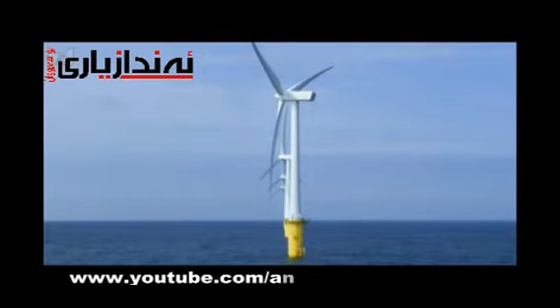We tend to class turbines by their power output, and hence their physical size. Wind farms might use many sub-megawatt turbines, each producing 400, 600 kilowatts each, or a few multi-megawatt turbines producing maybe up to 3 megawatts per unit. Apart from physical scale, they are arranged a bit differently, so let's start by looking at a typical sub-megawatt model.

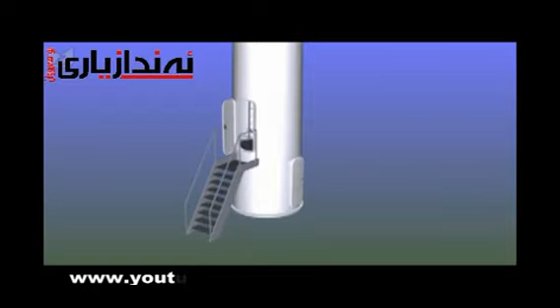Turbines of this type are typically 25 to 45 meters tall, and at the base you will often find 2 doors. The lower door takes you into a secured compartment where we have a high voltage step-up transformer. The generator at the top of the turbine is producing about 690 volts, and this transformer converts that into several thousand volts to send it more efficiently to the substation.

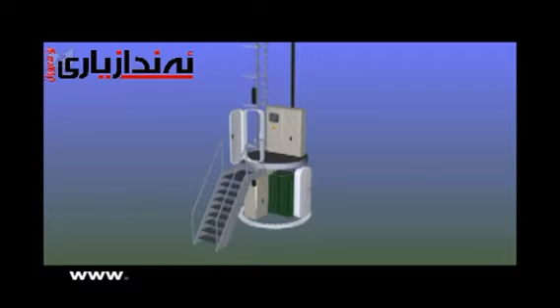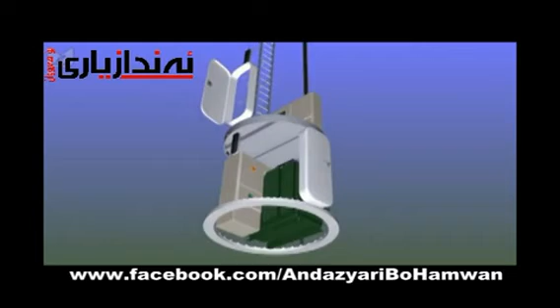The main entrance to the turbine is at first floor level, and there we find a control cabinet and the base of a ladder, or a series of ladders. Often in these smaller turbines, the ladders run to a series of platforms and they change sides at each platform to give you a rest area and a bit of fall protection. Platforms are generally just wooden discs suspended inside the tower walls, and they might have a trapdoor or a set of guardrails and a gate depending on how the ladders are arranged.

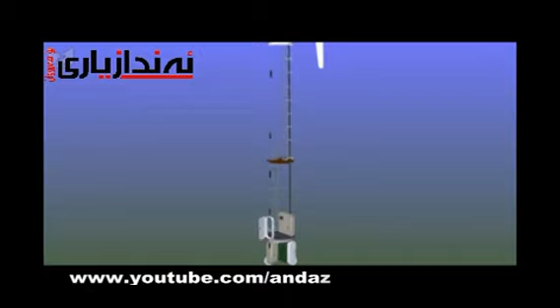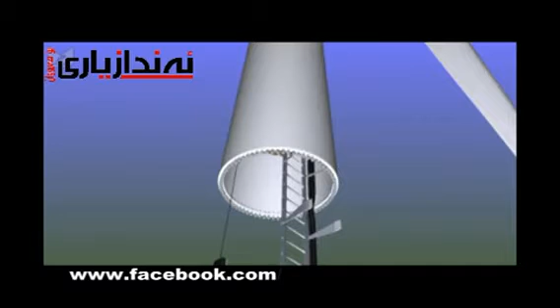The main run of cables goes up the wall of the tower, dodging past any intermediate junctions, because obviously the towers can't be delivered in a single 40-meter long section. They come in 20-meter long sections. They're bolted together with a lot of nuts and bolts. But as we move higher and higher through the platforms, they're getting slowly narrower and narrower, so the ladders are getting a little bit closer together.

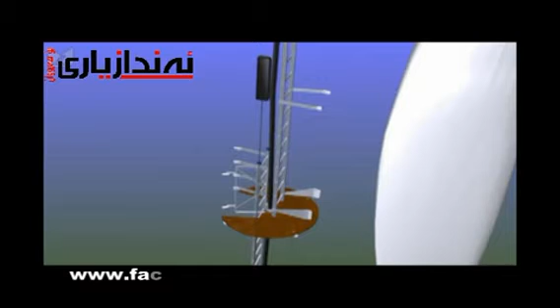But eventually the main cables stop being attached to the wall and they hang freely in the center of the tower, so they can twist as the nacelle rotates to face the wind. If they twist too many times, the nacelle will spin itself around to remove the twists. But as we move up, now the cable goes through a hole in the center of each platform, and at the top of the tower we have a steel platform with a sealed trapdoor, which we call the yaw platform.

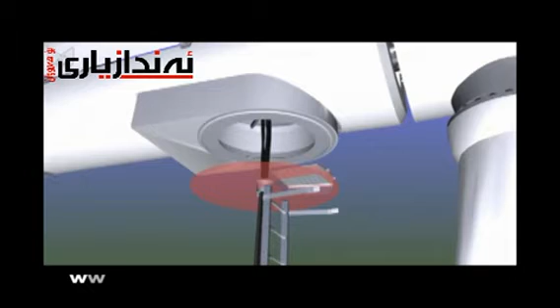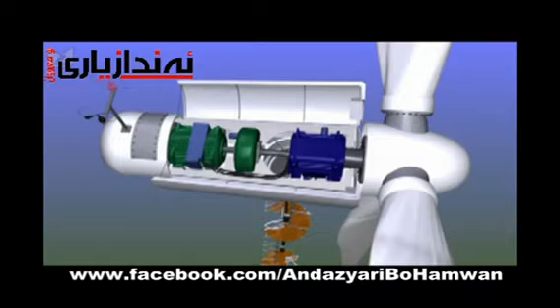Just above that we have the yaw ring with the bearings that allow the nacelle and the rotors to rotate around to face the wind. And this sealed platform acts as a bit of fire protection, also avoids people falling back down the tower, because at the top of the tower we simply have a hole through which we climb. And the nacelle in this case is a vaguely tapered tube. At the back we have the wind sensors, which give us speed and direction and allow the turbine to face into the wind and to change the angle of the blades.

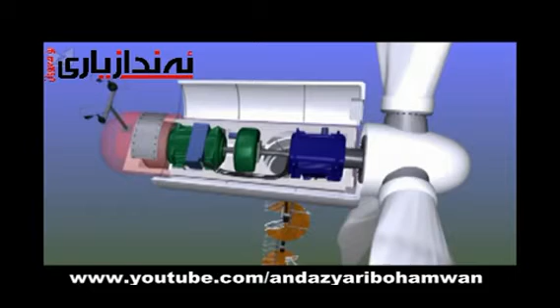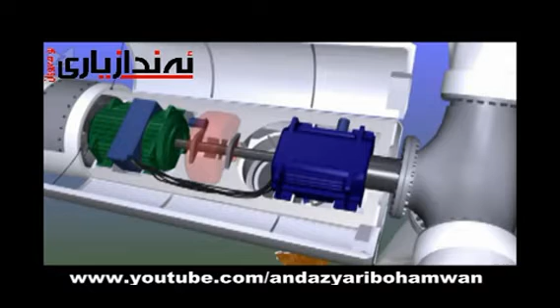The nacelle itself is just a fiberglass tube. At the front we have a similar fiberglass cowl protecting the hub, which is a steel casting on which we have bolted our 3 blades, and the blades can turn or pitch so that the angle they form with the wind can be varied. Out at the back of the hub we have a shaft which leads into the gearbox, then a high-speed shaft through a brake into a generator, and that generator then supplies the electrical power, as I say, at about 690 volts all the way back down the tower to the base.

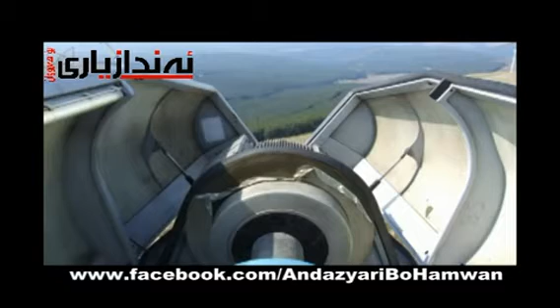And right at the back we have a cooling fan, as we're generating 500,000 watts of energy inside the nacelle. Some of that is wasted as heat, and without an efficient cooling system there is the potential for the turbine to catch fire. Now, the layout of a larger turbine is broadly similar, but some of the components are in different places, so let's start by looking at the tower section of a typical 2 megawatt turbine.

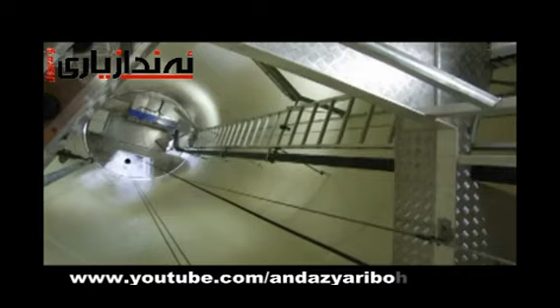Where we place the high voltage transformers in multi-megawatt turbines is a lot more variable. Quite frankly, we have a lot more room, so we can decide if they can be in the nacelle, they can be at the base of the tower, they can be on platform 1 in the basement, they can be outside in a hut. In this example, the transformer's at the top, so when we go into our door, the one thing we'll not find is a transformer.

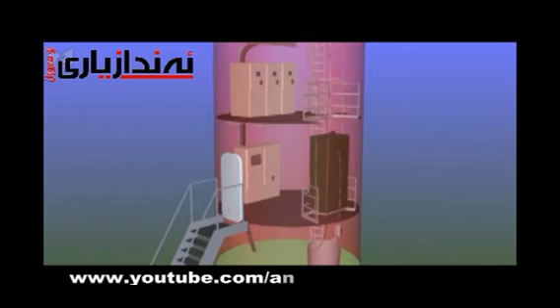We do have the high voltage switches, in this case on platform 2, but on the entrance platform we have the usual control cabinet and a lift, a little green box. And that lift will take 2 people to the top of the tower, or nearly to the top, without them having to climb the single, very, very long ladder.

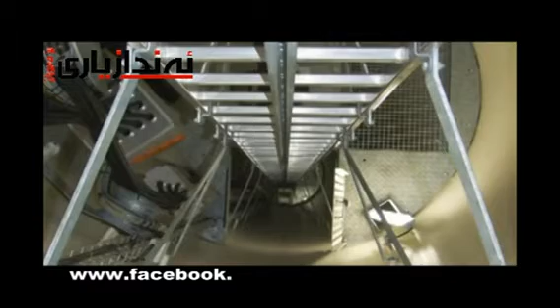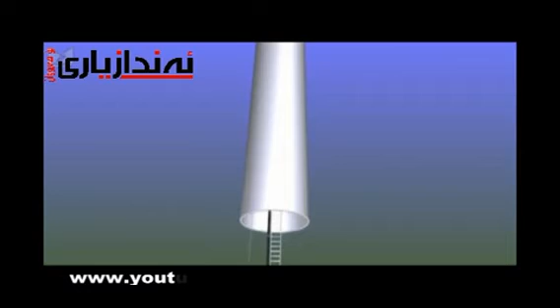Almost all large turbines will just have a single run of ladder for the majority of the run up the tower. It will have a wire or a rail system, a fall arrest device fitted to it, but it is still a long slog up the ladder, which is one of the reasons why service lifts are so important. And again, the tower's in sections so that it can be delivered around the country without demolishing villages.

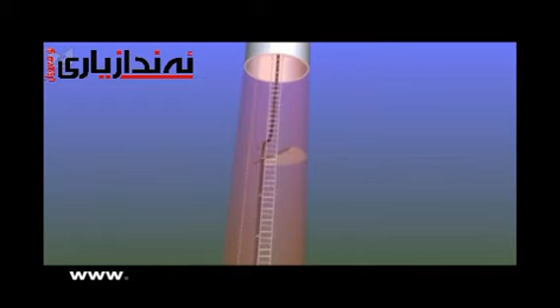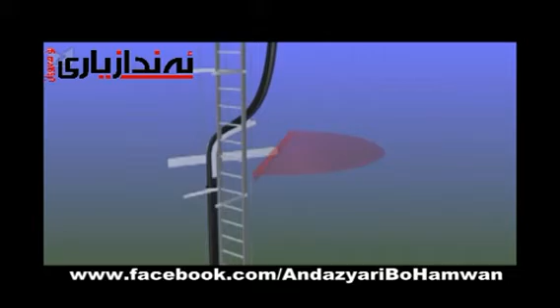Sometimes, if we're running a long distance and we haven't got room for a proper platform, we can put a half moon in place. No fall protection on the platform, but we assume you would keep your lanyards connected at this point because it's quite a long way down.

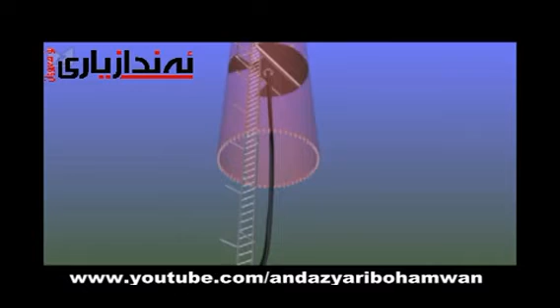The cable again breaks free from its mounting and hangs in the centre of the tower for the last 10-20 metres or so that it can rotate as the nacelle yaws into the wind, and the lift eventually runs out of space. Remember, the tower is getting narrower and narrower as we get to the top, so the lift tends to park itself about half a platform from the top, and we have a normal ladder which then leads to the yaw platform, and then it starts looking very much like the smaller turbine did.

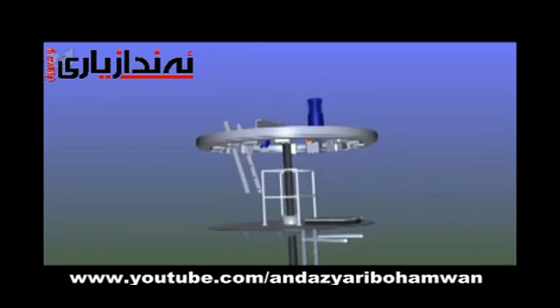We have a yaw ring bolted to the underside of the nacelle, joining it to the top of the tower. A series of disc brakes run around that yaw ring to lock it in position when the wind isn't changing direction, and when it is, we have a series of either electric or hydraulic motors that rotate the entire mechanism around on the top of the tower.

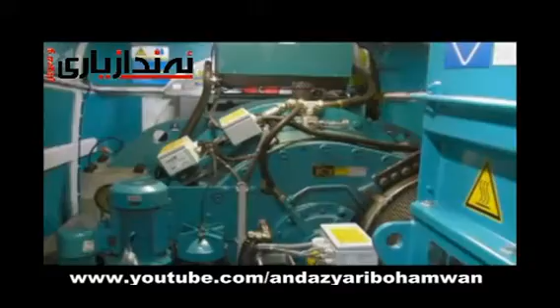The layout of a multi-megawatt nacelle is again more variable than for a smaller version. We always have to have a generator, but we may not have to have a transformer. In a few cases, such as the famous Enercon egg-shaped nacelle, we don't even need a gearbox. They're direct drive. We just have a shaft linking to a generator, and then lots of extremely complicated electronics to condition that power for connection to the grid. But in most cases, we need the same as we needed in the small turbine: gearbox, generator, possibly a transformer, all in a fiberglass box.

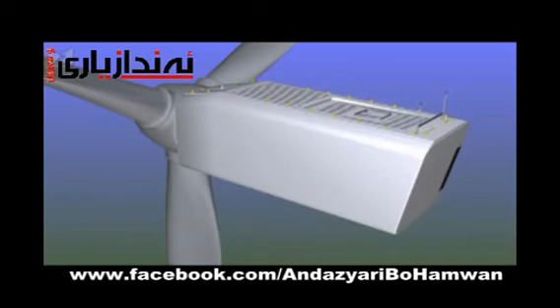And in our example, we're looking at a typical design used by a number of manufacturers where we have a nacelle that's 3 metres high, 2.5 metres wide, 7 or 8 metres long. It's a fiberglass box about the size of a site hut. As before, we have our wind sensors on the roof as far away as possible from the dirty air cast off by the blades as they spin round.

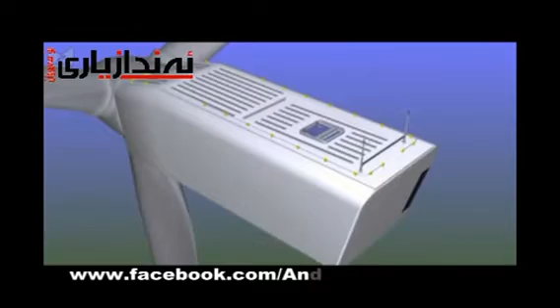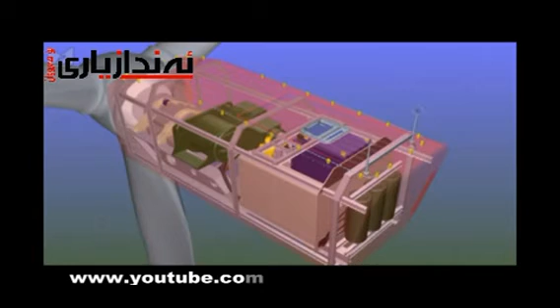This design is just a fiberglass box with a flat roof. We access the roof through a couple of skylights. Some designs are like before, big cylinder with 2 opening doors. Some have an entire roof section which opens, rather like an old camper van. If we take the skin off the box, inside we have the same kind of components we had before. They're just bigger, and there's a little bit more room, so they're laid out a bit differently.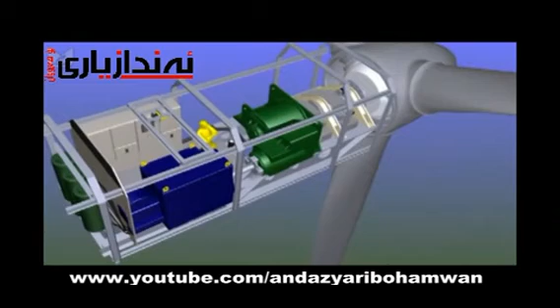The only additional component up here is those 3 green cylinders at the back. That's our high voltage transformer, which used to be at the base of the tower. Now, we've removed a lot of the control systems and the hydraulic systems that would just clutter up the pretty picture. We've added in a bloke for scale, but most of the big components are still here.

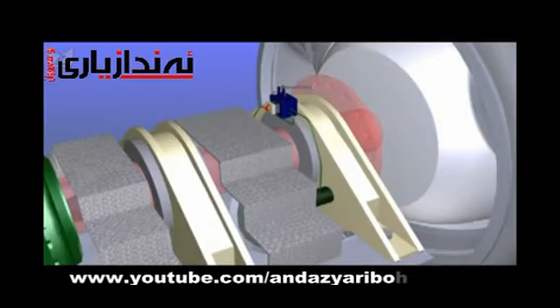If we look at the very front of the nacelle, we have a couple of bearings which support the main shaft, which is a hollow tube, 50, 60, 70 centimetres in diameter. It's hollow so that we can get electrical cables in through this main shaft into the hub to drive all the control systems inside the hub. And we have a couple of pins on the first bearing that lock the main rotor in position if we need to access the hub. It's a safety feature. If you're in there and it starts rotating, it gets scary.

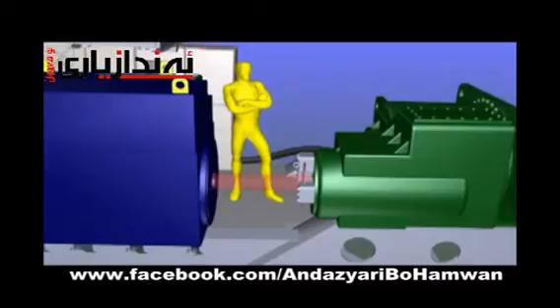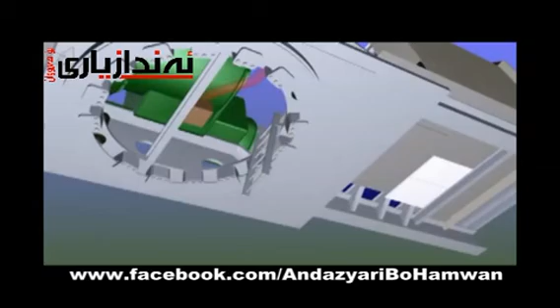So our main shaft drives our gearbox, which is mounted centrally because it's often the heaviest component. Out of the back comes a high-speed shaft, as before. That's where the braking system is. The high-speed shaft then drives the generator, which is usually oil-filled. The generator then supplies 690 volts, in this case into our transformer, which is sitting right next to it. That high-voltage signal then passes through the switchgear and the cabinets, down the dropper cable, straight down to the bottom of the tower, through those switches on platform 2 and off to the substation. And that, as an overview, is pretty much all there is to it.

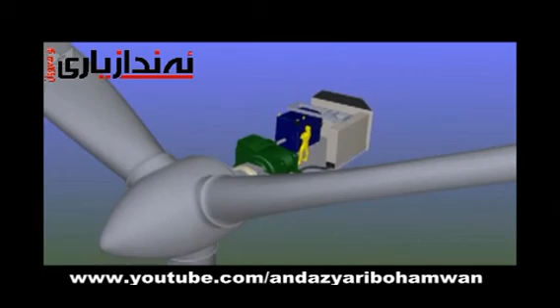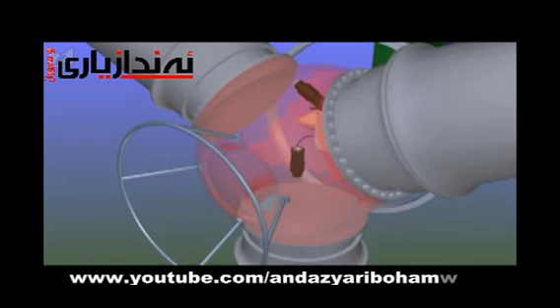The only thing left to talk about are the blades, obviously, which actually do the work. We still have 3 of them. They still pitch, in other words, they twist on themselves to line up with the wind. And you access the hub through the gap between this fiberglass cowl and the cast hub. It's a bit of a wriggle, but you wriggle through, usually feet first, crawl through the hole in the middle of the hub, and inside the hub we'll find the control electronics, the pumps, the motors and the batteries to control the pitch of each blade, rotating it on its own bearing to set the optimum angle for the wind.

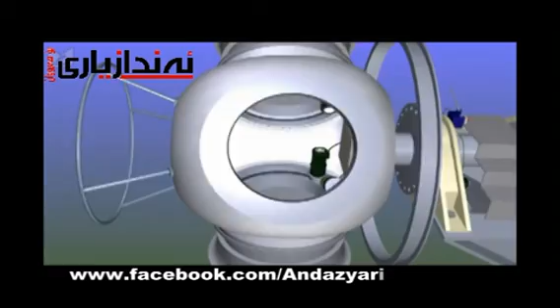If we turn the blades through 90 degrees so they're edge on to the wind, there's no net turning force. It's a process called feathering, and the turbine will stop. Obviously there is a vast amount more going on inside a turbine, lots of wiring and control systems and lights and sensors and fire extinguishers, etc. But that is basically it, the general overview of most turbines that you find on wind farms today. Designs for the future will be significantly different, but at the moment